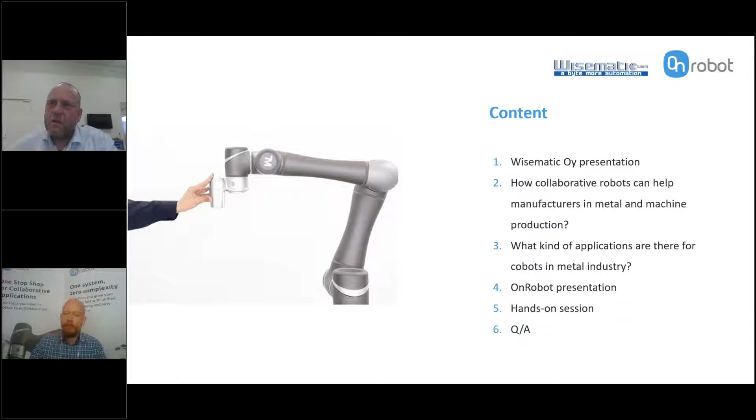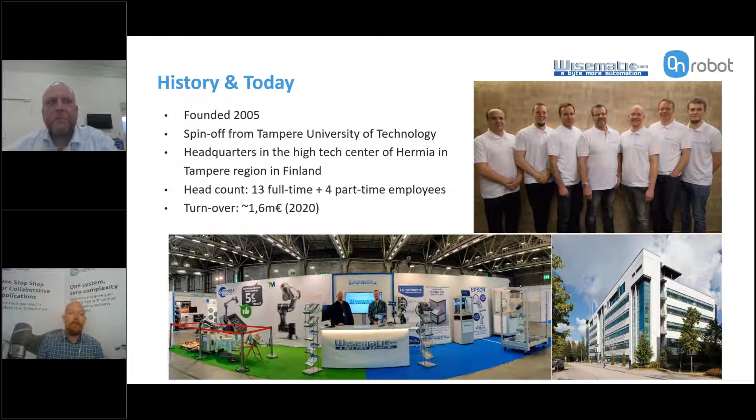All right, a brief introduction to Wisematic. We are a company founded in 2005. We are actually a spin-off from Tampere University of Technology. Nowadays we are located just across the street next to the university in the High Technology Center of Hermia in the Tampere region of Finland. Currently we employ 13 persons and a group of part-time employees, and in 2020 our turnover was approximately 1.6 million euros.

The focus of Wisematic is to offer tailored, customized automation solutions for needs that you can't buy solutions off the shelf from anywhere else. So basically we customize automation for your needs, and often those solutions require high flexibility and maybe high performance in regards of accuracy or speed. We focus our business mainly on mini, medium, and compact size parts and products. This is in reference to robot arms and handling of parts with robots, but we also do some logistics applications where we can handle pallets up to 1,000 kilos.

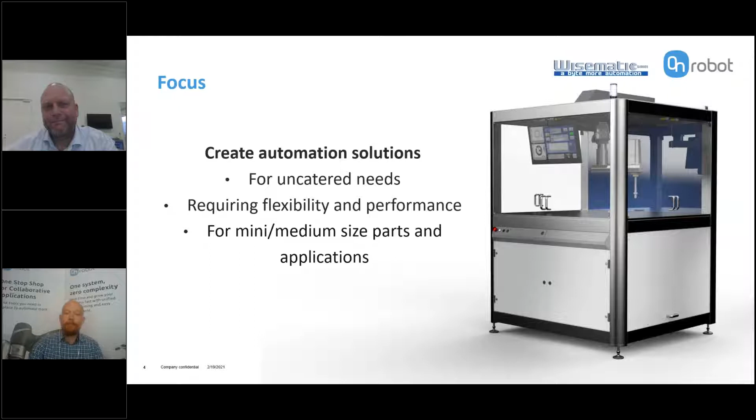Our mission at Wisematic is to help companies in the Nordic and in Finland to be competitive and profitable with the means of automation and robotics. At the high salary cost we have here in the Nordics, in the production business, we think it's necessary to use automation and robotics to be competitive on a global scale in general.

Our offering consists of branded products and technological platforms. Branded products include stuff like robots, robotic tools, and machine vision components, and so forth. The technological platforms we have include, for example, robotic cells, and some software components which help us speed up the development process for our customers.

Then we have a wide range of services that we offer, ranging from all categories of design - system design, software design, control system design, machine vision, safety design, and of course integration of different areas together. Basically this means that we can offer you guys turnkey solutions and systems, from pre-studies and proof of concept studies to design, validation, installation, ramp up, training, and services as well.

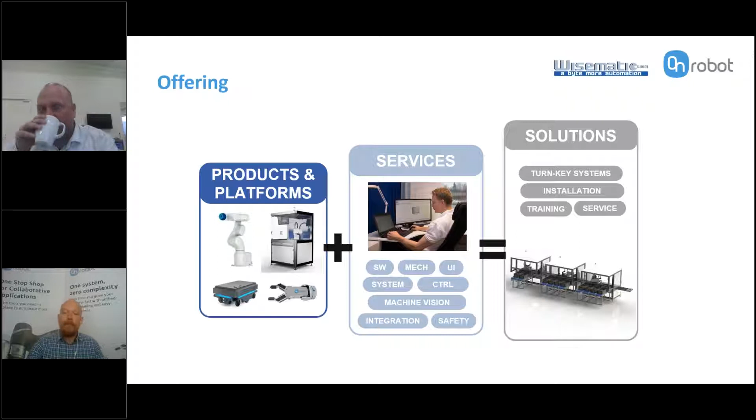Our portfolio includes global leading brands like Epson in industrial robots, Techman in collaborative robots, and Mir in mobile robotics, and of course other brands like OnRobot, top of the heap.

We can help you with a wide variety scope of different kinds of applications, from assembly to quality inspection to material handling and logistics and so forth. You can challenge us with your applications and we can hopefully help you guys out. Our customer and reference portfolio includes companies from different fields of industry, from electronics manufacturing to machine builders to consumer products to medical supplies and also food, among others.

Today we are talking a lot about collaborative robots, and our collaborative robot offering comes from Techman. We chose Techman because we believe it's a leading technological company in the field of robotics, and they were the first company to integrate machine vision as a standard thing in collaborative robots. I'll talk about that later, and why it's very useful to have machine vision included.

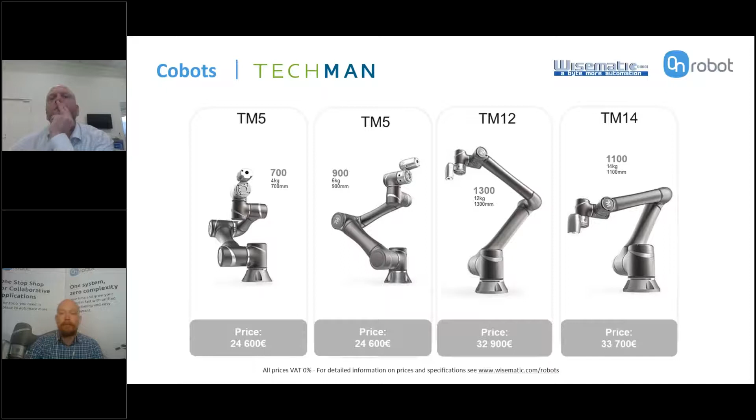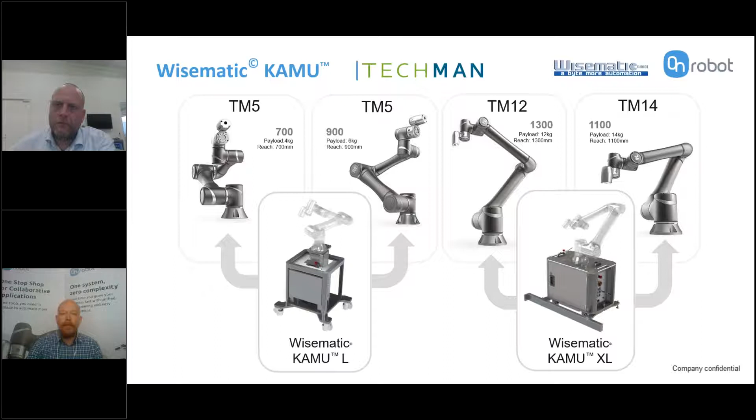This is an example of one of our technological platforms. We've designed a mobile stand platform for the range of Techman robots. With these platforms, we can enhance and improve the capabilities and flexibility of collaborative robots, introducing wireless connection, remote monitoring, and the possibility to add all kinds of peripheral systems for the robots. We call these platforms Wisematic KAMU.

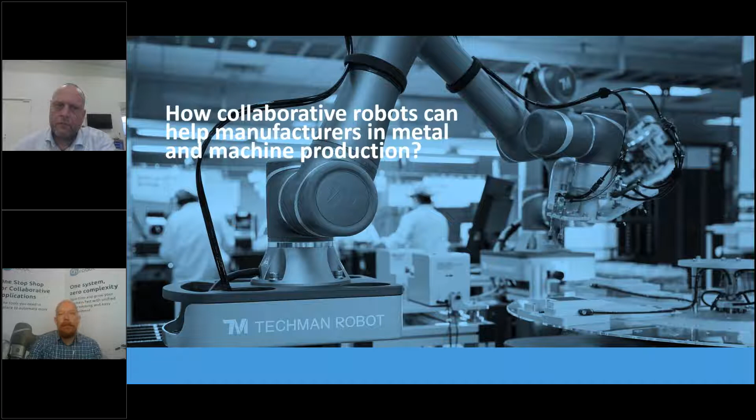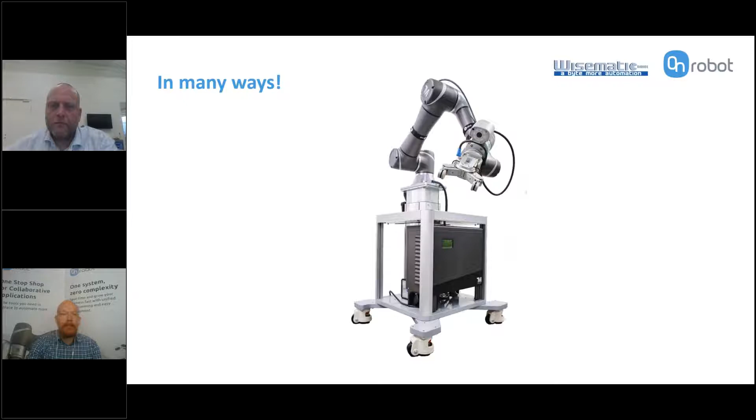So let's have a look at how collaborative robots can help you as a manufacturer if you're in the business of metal and machine production. Collaborative robots can help you in many ways, and they are quite different to standard industrial robots. They can share the workspace with human operators, and they're very compact and much more affordable than standard automation systems.

So they bring a lot of benefits. In general, with a collaborative robot, it's easy to eliminate waiting times. A lot of operators in factory halls wait for the production machinery to finish its work cycle, then repeat the unloading and loading of the work pieces to the machines. This could be quite easily automated with collaborative robots, eliminating the boring repetitive tasks the operator might not be fond of. You can also use the robot to take away unergonomic tasks and help the operator that way.

You can enable flexibility compared to traditional automation systems. Collaborative systems are much more flexible - you can move them around and automate different kinds of tasks, which is much more flexible than standard robotic systems. When employees personally realize that management is willing to invest in new technology and take away boring, dull, and maybe dangerous tasks, it increases personal motivation quite a lot, and that way also the work satisfaction of your employees.

With the collaborative robot, you can increase your unmanned hours - you can leave the machine running overnight, for example. You will increase your throughput, your yield, and also the quality, as a robot doesn't make mistakes like an operator easily can. All this together, you can save space - collaborative systems are much more compact and agile compared to traditional systems that are fixed to the floor. You can save time through implementation, it's much quicker, and they are much more affordable compared to traditional solutions.

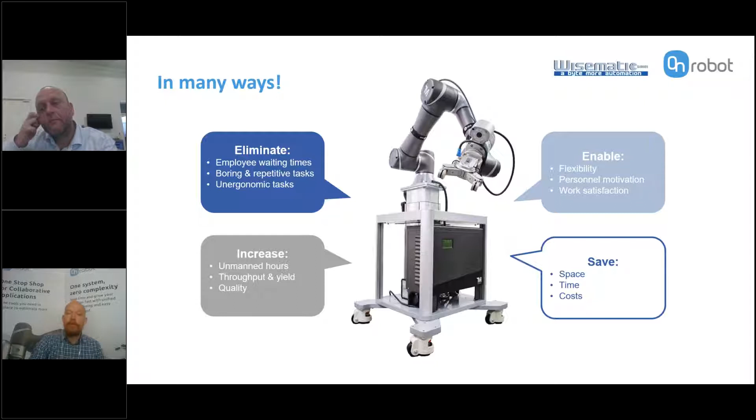Let's have a closer look at the differences between investing in a traditional robot versus collaborative systems. First of all, the design effort - traditional systems consist of a lot of different subsystems and components, and you have to design the whole system down to every detail before you can even start doing any trials. But with a collaborative robot, it's easy - just get the robot, pick the right tool, fix the robot, and start implementing in minutes. This is an easy way to start doing trials and validation to see if it works for you.

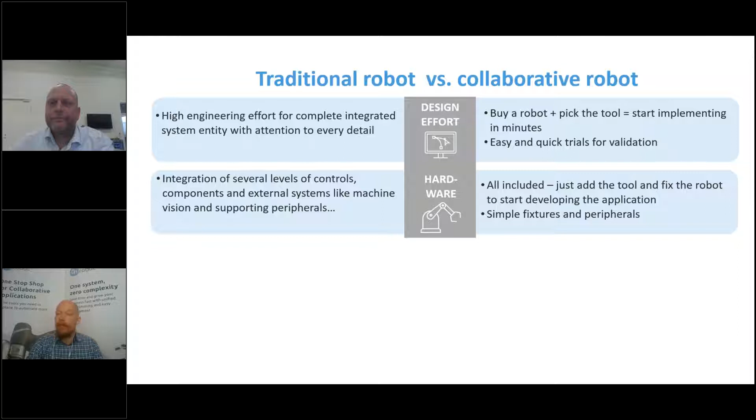Comparing the hardware, a traditional system consists of several layers of controls, components, and external systems, and integrating it all together is a big task that can be quite complicated. Whereas in collaborative systems, everything is basically included. For example, in Techman, you have the machine vision, the safety system, and the user interface all ready - you just need to add the tool and you can start developing your application. Sometimes you can even use the manual work fixtures and peripherals that you used before.

The same goes for software. Basically, standard traditional systems have several different layers of software, and all this has to be integrated to work together. This requires expertise and knowledge of how to do it.

But with collaborative systems, for example Techman, everything is included. You have everything in the graphical user interface to program the motions, the machine vision, everything you need. You don't need long training or experience to be able to program the robot.

With changeovers, with traditional systems, you might have to do everything all over again when you have to adapt the robot to a new task. And of course, this takes a lot of time and a lot of money.

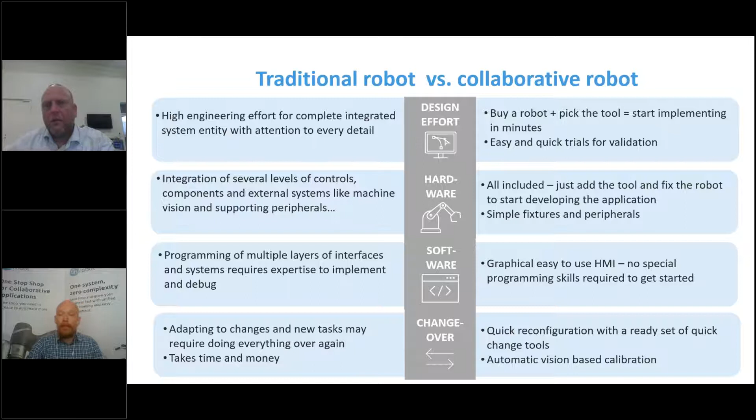With collaborative robots, the reconfiguration is also quick and easy, and you can easily move the robot around the factory with automatic calibration, for example what Techman provides. This is actually quite an important part of Techman. I'll talk about that later on.

So here are the ingredients that we think really create genuine flexibility in your production. You can have the Techman robot with the landmarks. You can have a mobile platform for the robot, which makes it easy to move the robot around in your facility. Then you have to have a nice portfolio of tools with quick change, so you can change the tools according to the applications you are having.

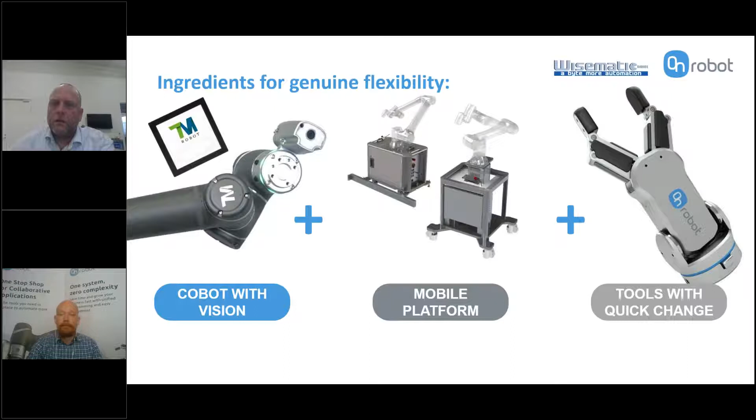Here are more details about the landmark technology Techman uses. Basically, you can use the machine vision system in the Techman to calibrate the robot to a specific location. The calibration uses a small sticker called a landmark, and you can fix these stickers to any machine or pallet, and the robot always calibrates itself based on the sticker.

So you can easily move the robot around the factory, and the first thing before it starts to work, it uses the sticker to calibrate itself, and then the program you have taught the robot earlier works again fully in that certain position.

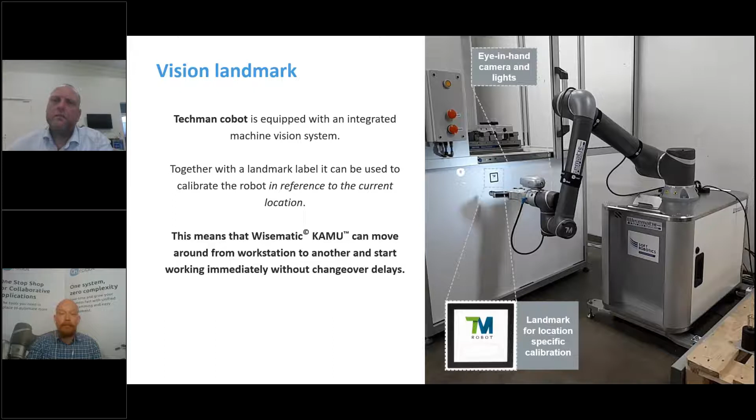This means that you can use the same robot in multiple locations. In the morning, you can have it working together with the operators in hybrid assembly, for example. In the afternoon, you can move it to do some palletizing, and for the night, you can leave it to tend the CNC machine so that you have a ready set batch of parts available in the morning.

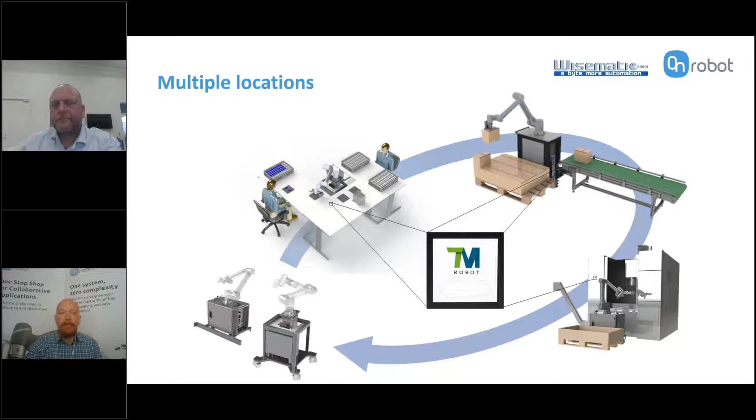So this is what we think is quite extraordinary and really flexible automation. Let's have a look at what kind of applications have been done with Techmans in the industry.

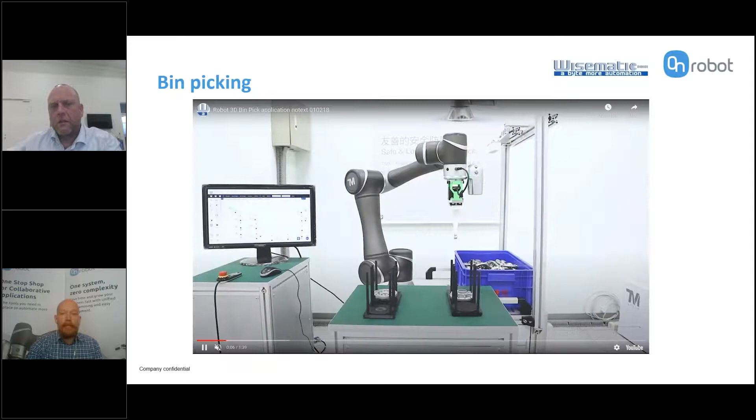First in the line is bin picking. So basically this is a bin full of parts just stochastically placed in the bin. We are using a 3D camera that creates a point cloud of the parts in the bin, and the robot compares the point cloud to a 3D model that it has been taught before.

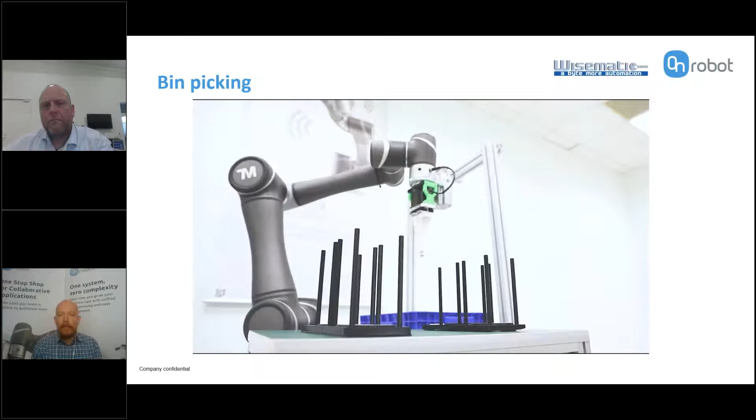Here it uses the camera first to locate the magazines that it will load the parts to. Then it analyzes the point cloud, recognizes a part, picks it up, and loads it into the magazine. So you can use this to load magazines full of parts that will be processed later on in your manufacturing.

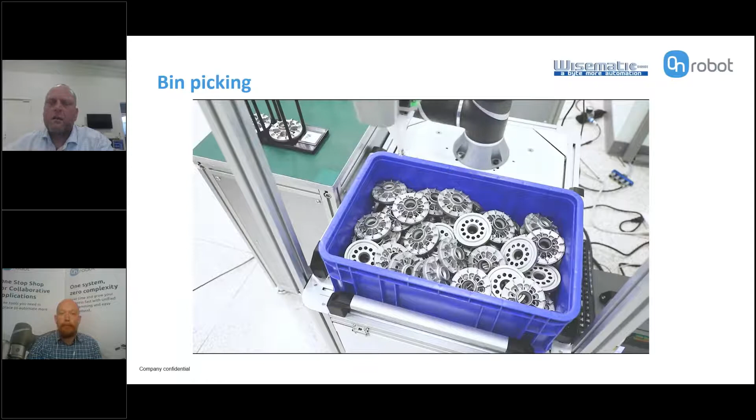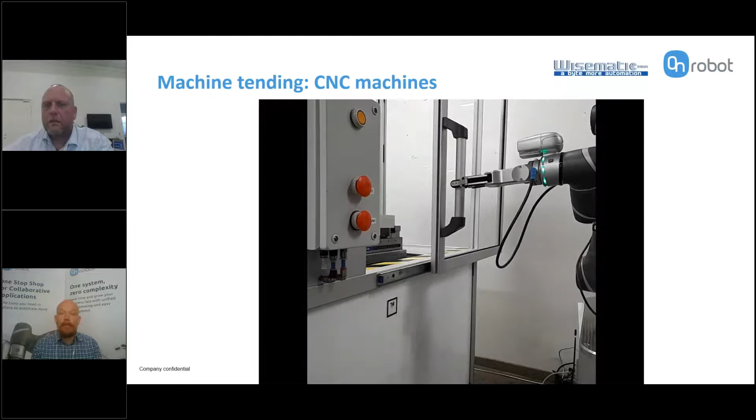The cobot is basically mimicking the operations of the operator. It opens the door itself, it pushes the buttons, it can even use the camera to read out displays from the CNC machine, or lights—when the lights turn on, when the work cycle has finished, it can use the camera to recognize that, okay, now I'm free to remove the workpiece from the machine.

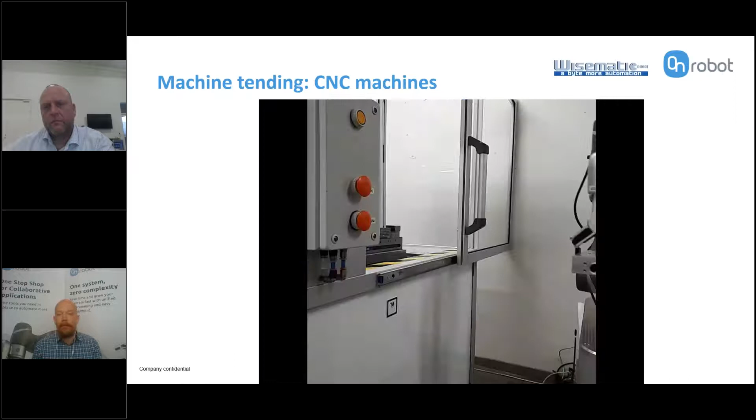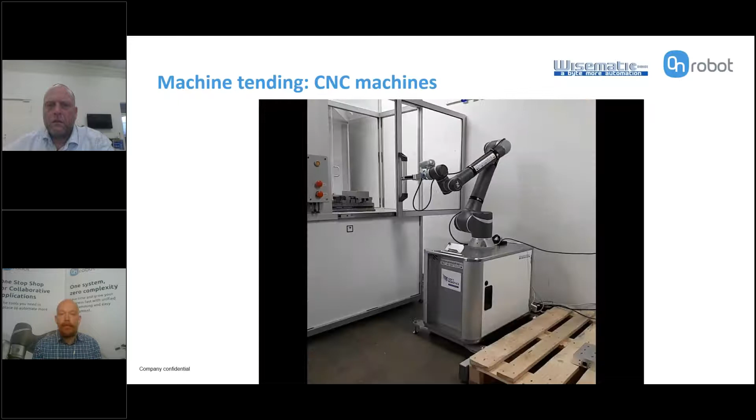Here you can see that it's loading up the machine with the workpiece, closing the door, and then starting the work cycle. So very easy implementation, with no physical or electrical integration really required.

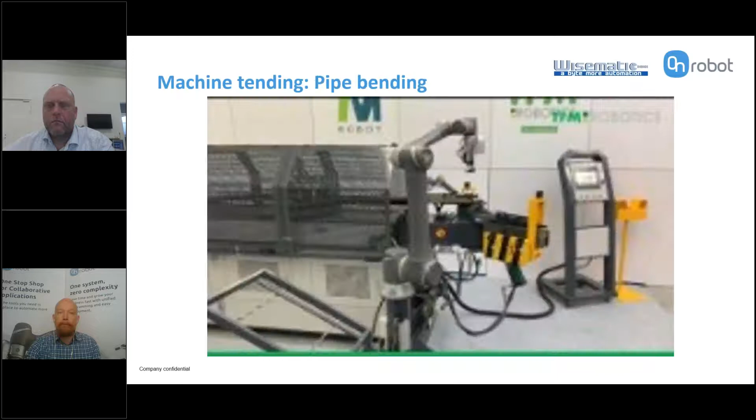Here's another example of tending a pipe bending machine, so very easy implementation. The robot picks the workpiece from a simple rack and places it in the machine. There's an I/O connection that tells the machine that the part has been loaded and the work cycle can be started.

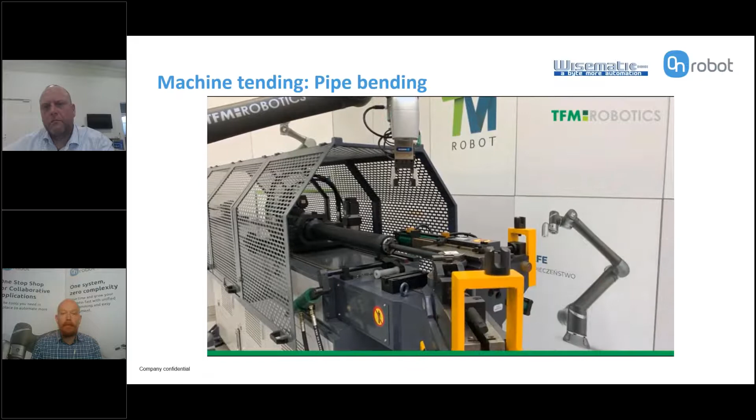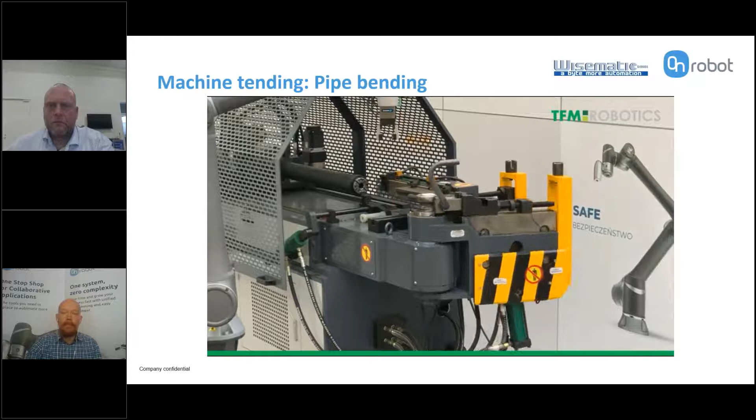When the pipe is bent, it will pick the bent part and drop it in a box and start all over again. Very easy machine tending application.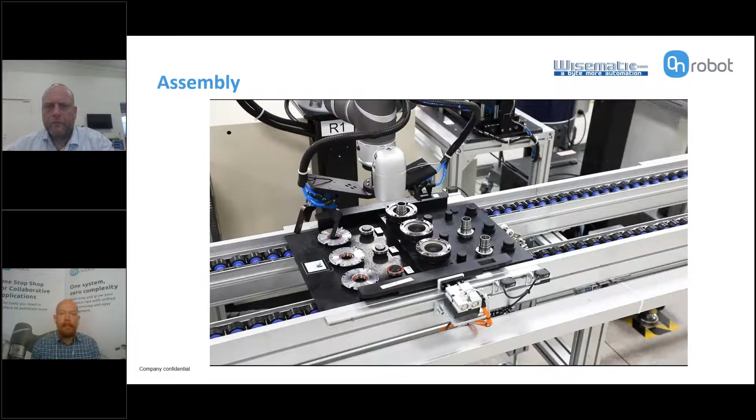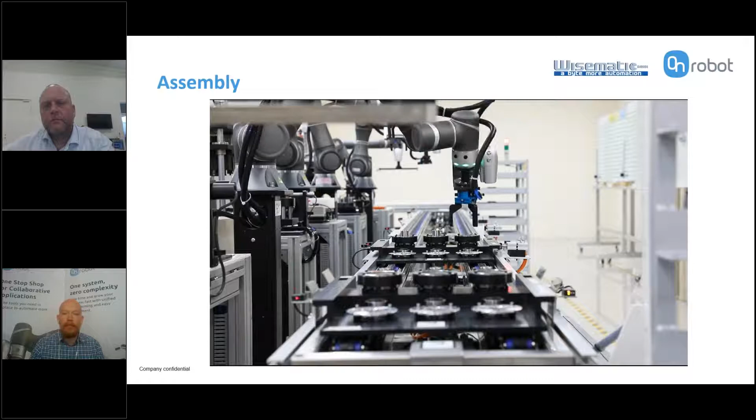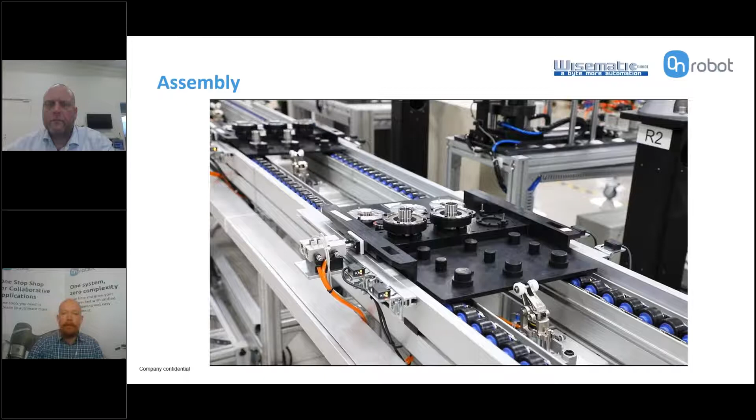Next one is an example of assembly. This is an assembly of some kind of gearbox or motor, and the parts arrive in a pallet. The robot uses a dual gripper to grasp the pallets and takes them to an external jig to perform the actual assembly. There's a landmark sticker on each pallet, so it works precisely and reliably, using the landmark to locate the pallet. Then it moves on to the next station, and the same is repeated for the next phase of the assembly. In the end, you'll have a pallet full of assembled parts.

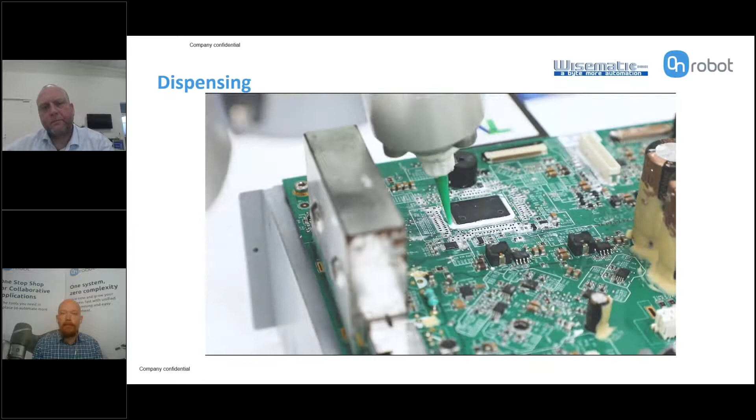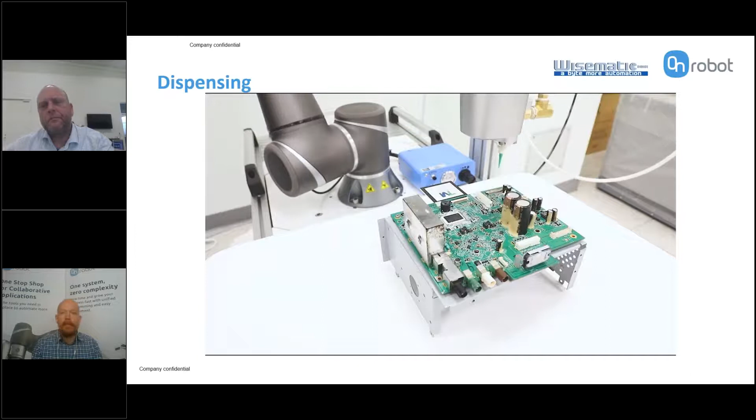Here's an example of dispensing. This is from an electronic part, but basically the same goes for any metallic products as well. It uses the camera once again to locate the exact position of the parts, and then it knows where to do the dispensing, so you can dispense glues or different kinds of gasketing materials.

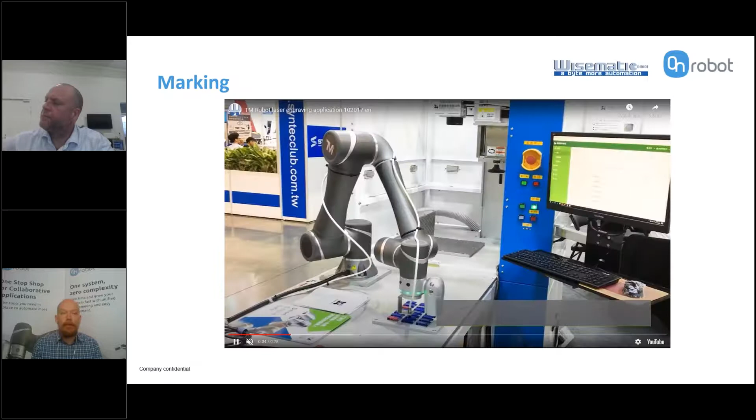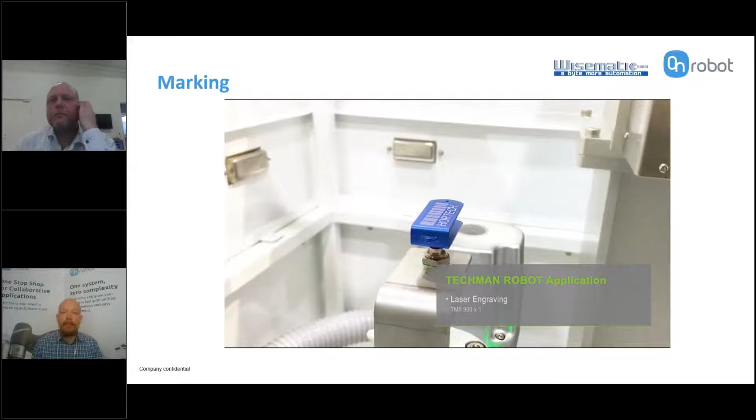It's an example of tending a laser marking machine. The robot picks up the parts, serves it up under the laser optics, holds it there while the laser marking machine does its work, and takes away the part and picks the next one. Very easy and simple application.

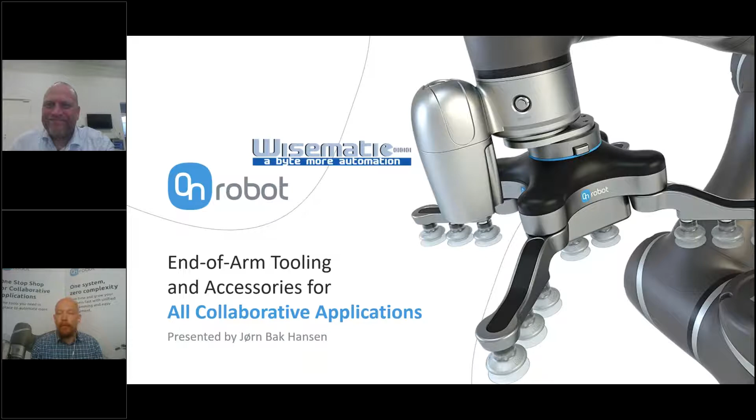All right, then I'll hand over to Jørn, and Jørn will tell you more about OnRobot and the tools OnRobot can offer you.

Please unmute yourself, Jørn. Thank you so much, Timo. I just trained as a presenter, and I forgot to unmute myself. I'm sorry about that. But hopefully you'll be able to see my screen now. Just give me a second.

So, my name is Jørn. I'm coming from the company OnRobot in Denmark. My position here is that I'm a technical sales manager. On Robot is a company who will provide you with grippers for any task that you have in your production. So what we like to say is that it's a one-stop shop for all grippers that there is on the market.

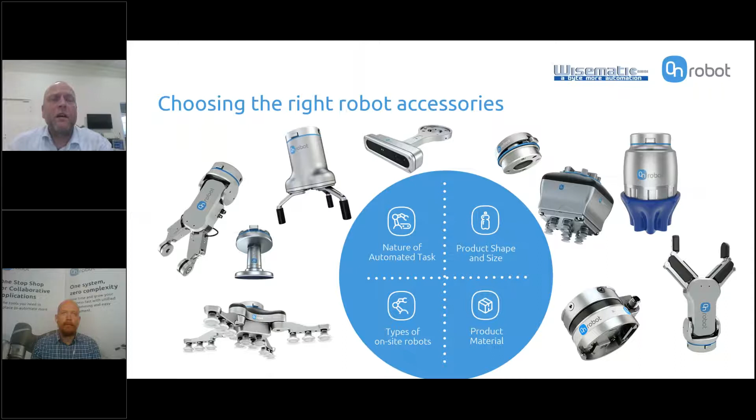Before you actually start implementing an application with robots, one of the first things you have to have in mind is that you need to choose the right gripper for the right application. And with that said, I think On Robot has one of the biggest ranges of different kinds of grippers that fit directly to the TM robot that you'll see later today, and how easy they are to implement onto the TM robot. On Robot basically wants to be able to provide you with grippers that work on every robot for every application and have the necessary gripper for that application that you need.

And of course, for all industries, it doesn't matter if it's food industry or metallic industry, we will have a gripper that's providing the task for you. If you look at On Robot's product universe, as you can see here on the picture, we have grippers, sensing, vision, processing tools, and tool changing.

If you look at the tool changing, I think it's a really genius way to solve all the problems, because we have a tool changer that actually just takes any of On Robot's tools and puts them on really fast, and you only have one cable running down the robot. It doesn't matter if it's a vacuum gripper, a finger gripper, a screwdriver, or even a hex sensor, you just have this one cable running down the robot. So that means you have a simple setup without any compressed air or multiple cables running down your robot.

If you look into the gripper portfolio, we have the RG2 grippers and the RG6 grippers. I'll talk a little bit about how they are working a little bit later. Then we have our vacuum grippers, the VG10 and the VGC10 gripper. For both of them, they are grippers with a built-in vacuum pump, so there's no compressed air onto those grippers. They are all electrical. That actually goes for any of On Robot's grippers, is that they are all electrical. There's no pneumatic air or anything else on those grippers.

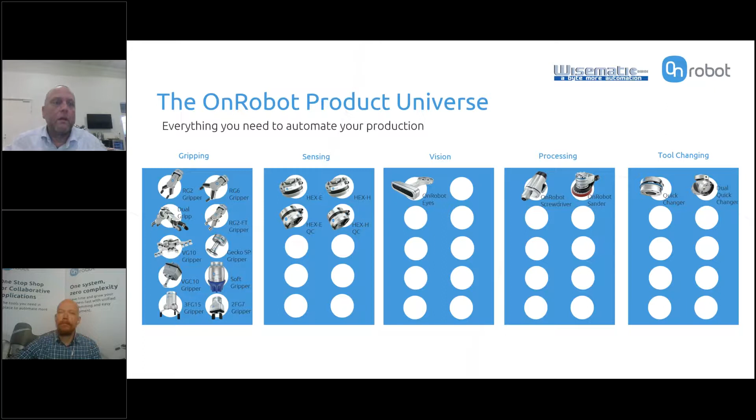So on the next slide, I would like to talk to you a little bit about the 2FG7. What is really cool about these grippers is that they are really easy to program. I'll show you all about that later when we have the hands-on. What we have here is a gripper where you can program the stroke in millimeters and at the same time program the speed and the force that you want to attach to your product. And it's really, really simple.

For the Techman robot, you basically just implement the software that we provide with the gripper into the Techman. It takes roughly about 5 minutes. And then afterwards, you have the drop-down menu, choose the gripper that you have bought, and then you have all the necessary things that you need to program the gripper. I'll show you later how easy it actually is to change the grippers and how easy it is to get them to operate.

So that means that you will have a really fast return on your investment when you're buying the products from OnRobot. We'll be able to provide you with the products within 24 hours. And if you look at it, it will take you roughly 2 to 3 hours, and then you'll have a simple setup up and running. And of course, Wisematic will be more than helpful to help you guys out trying to program these grippers.

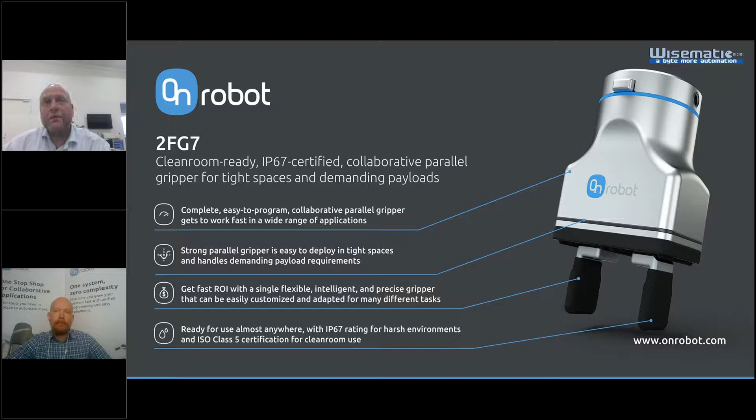If you look at the 2FG7, it has an IP67 rating, as I said. It also has an ISO class 5 certification for clean room use. So if you're in a laboratory or somewhere else where you have a clean room, this gripper will also be a really cool gripper to use in those applications.

The 3FG gripper, or 3FG15 gripper, is a 3-finger gripper which is really, really small compared to the payload it has. It will be able to lift 15 kilograms. So if you have a piece of iron that weighs 15 kilograms, this will be a really perfect solution for you guys. Again, it's adjustable in force, and adjustable in millimeters in the diameter that you want to grab around. It also has brakes on it, so if you lose power or anything else, it will still have the brakes on and your product attached to the gripper.

So you will not drop it on the floor, for instance. All the fingertips on all the grippers from OnRobot are adjustable. That means you can change the fingertip yourself, and you can 3D print any fingertips you need for your applications. For instance, if you have a product with a special shape, you can take the fingertips for that gripper and 3D print them so they fit directly to your product.

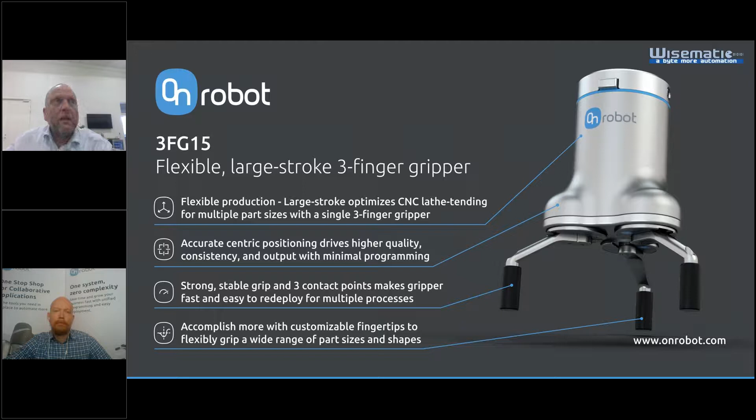The RG grippers are basically the same. They have a really wide stroke. The RG6 gripper has a stroke from 0 to 160 millimeters and a force from 25 to 120 newtons. That means if you reach the force you want to apply to your product and haven't reached your millimeters, you'll have feedback that it hasn't reached them. And if it reaches the force, the gripper will stop closing and maintain the force you're applying.

You can see here in the picture that there's something built into the fingertips - built-in PLd Cat3 sensors, which are a safety feature built into this gripper. So if people get their hands into the gripper, it will actually stop functioning until the robot stops. So it's a safety feature built inside the gripper as well.

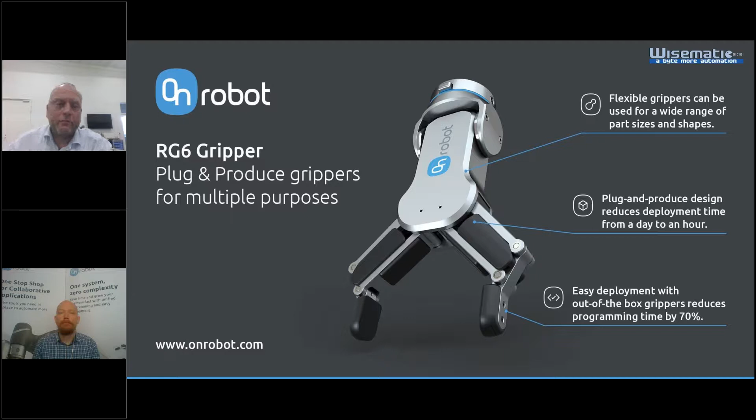Then we come to the vacuum grippers. For the vacuum grippers, we have the VG10, and as I said, the VGC10. Both grippers have a maximum payload of 15 kilograms. What's really cool is that no matter which one you choose, you can change the suction cups, you can 3D print models, so you can actually grab a product that fits directly to you. And the coolest thing is that it's a 2-channel gripper and it's electrical. So you don't have to run compressed air or vacuum down to your robot - it's just one cable running down the robot, and then you're up and running.

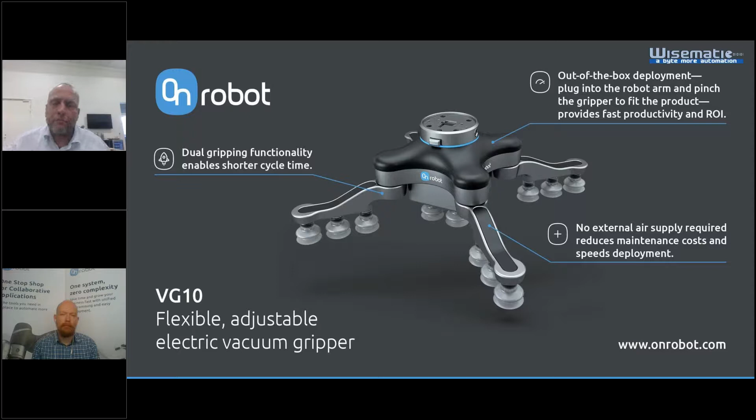The last thing I want to show in this presentation is the force torque sensor. If, as Timo showed you, we want to assemble something and you don't know exactly where your product is, the force torque sensor will be able to guide the robot into the position where you want to grab your product. Or if you want to palletize or depalletize, you can actually feel, without a camera solution, where the product is if you have different heights in your products.

As you can see, it's a really high accuracy sensor. So if you have any insertion or assembly task, this sensor will be able to help you out in your programming as well. That means if you want to search for a product, or grind a product, polish a product, or anything else, then you're up and running with this force torque sensor.

Now I would like to show you, if I can, how fast it actually is to program and change the grippers on a Techman robot. So I'll just switch the web camera, and hopefully you'll be able to see that now and still be able to hear me.

So what we have right here is a 2FG7 gripper - I have just clicked it on. We have the quick change here; you can quick-change it to a dual setup if you need that. Just one cable, as you can see, running up the robot. I can change between any gripper in our portfolio with just one click like that, and then I'll be able to operate the gripper straight afterwards. As you can see, it's pretty fast.